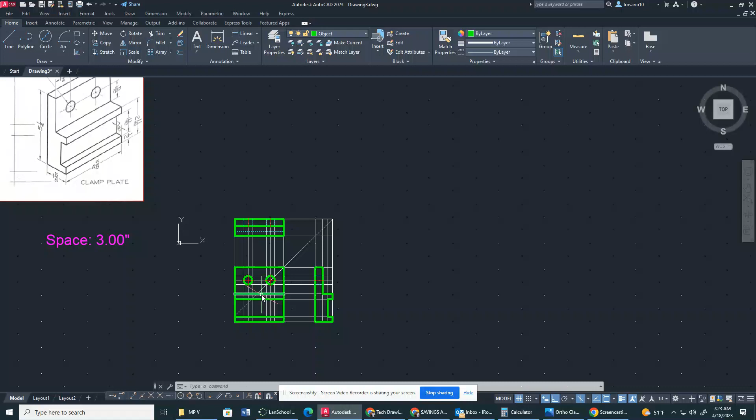So what we're going to have here is we're going to create the isometric drawing of the clamp plate. If you want to see it bigger, it's right here. So we already have our orthographic projections. Now, I'm going to start off with this by creating a bounding box. The bounding box is basically a construction box made with construction lines. With that construction line box, we're able to know if we're outside of our parameters, okay?

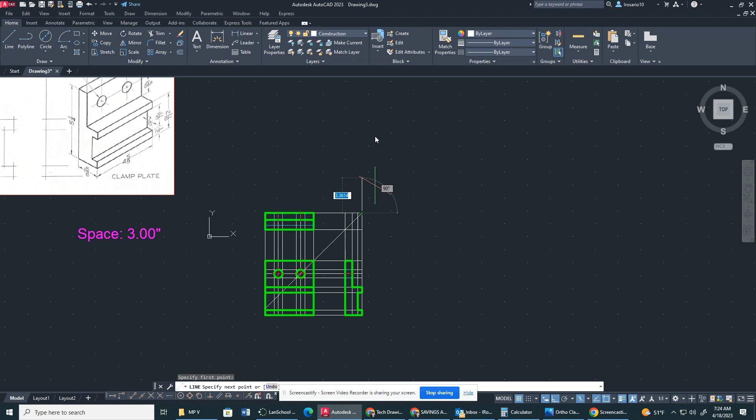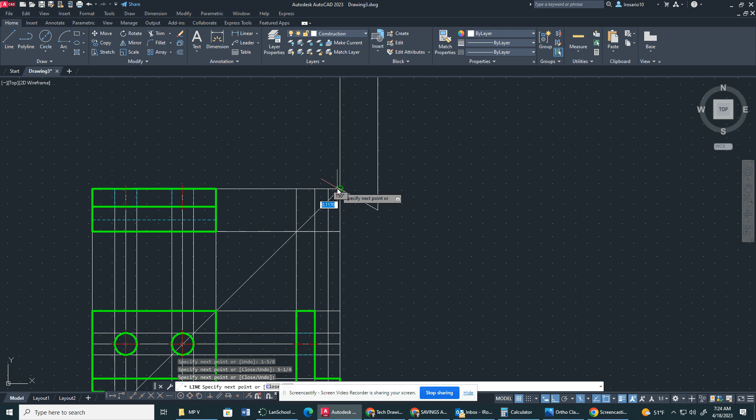So to start that off, I'm going to start off from this edge right here. I'm going to go up 5 1/4. I'm going to go over 1 5/8. I'm going to go down 5 1/4. Right? And I'm going to change my view. Go into my top view.

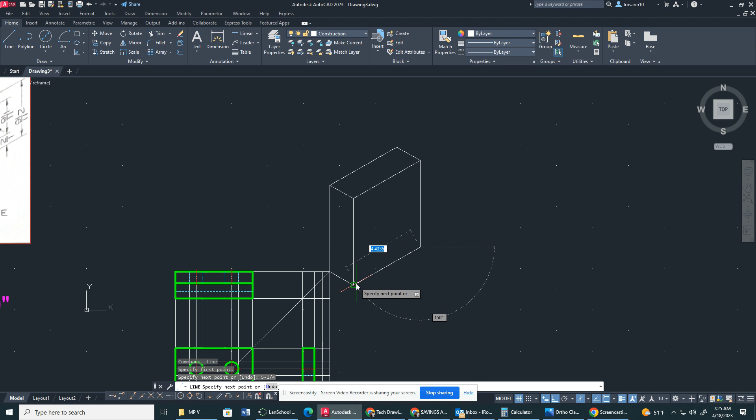I'm going to go across 4 5/8. I'm going to go over 1 5/8. Close it up here. Go down 5 1/4 and go across. Okay. So

I'm going to change my projection and I'm going to draw this from the side view. I'm also going to change my layer property to object and I'm going to go down all the way, go across, and then I'm going to go up 1/2 because it's ½ inch up. Then I'm going to go to the left 7/16. Then I'm going to go up 1 11/16. Come back out 7/16. Go up

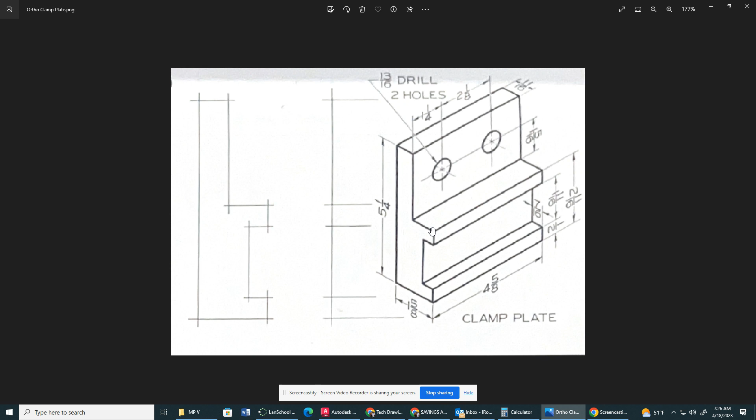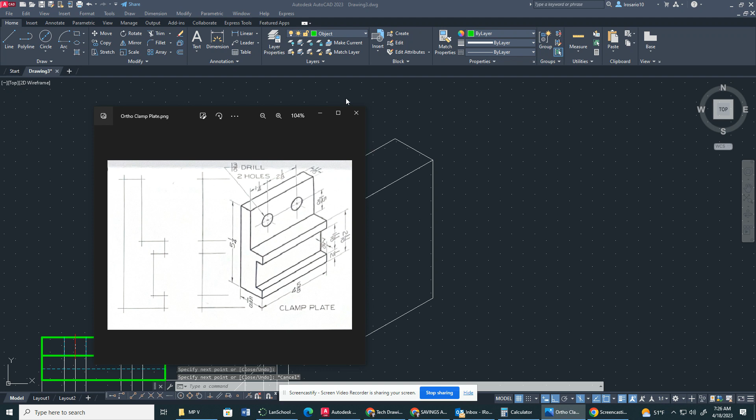1/2. Now, to find out this measurement right here, what you would do is subtract 11/16 from 1 5/8, right? Because we want to get this ledge. So that comes out to 0.9375. And you have to go up. If you go up, that is 2.5625, and then you come across, right? So to get that 2.5625, all you have to do is subtract 2 11/16 from 5 1/4. Okay.

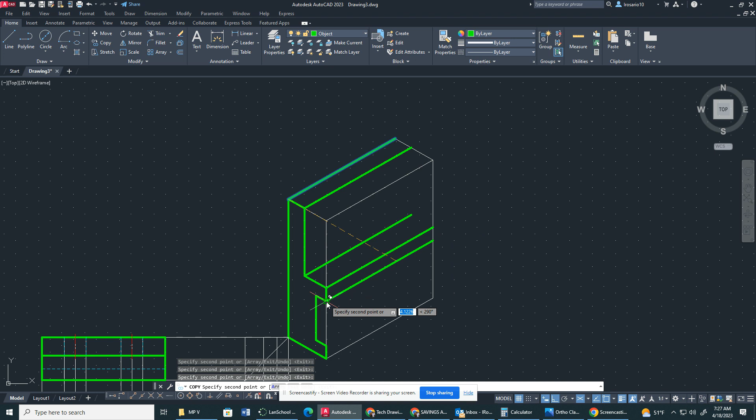Now, all I have to do is draw a line here. And this is where it gets easy. So I draw a line going all the way across, and then I'm going to copy this line. Right here, right here, right here, there, there, there, and there. Now, all I do is just create a line, and I fight the constraints because it's going to want to go straight because we have ortho mode on right here. All right.

Now, I'm going to stop right there. I'm going to change my view, and I'm going to go from the bottom, right? And I'm going to go up 1 11/16. Now, just remember, we're going to have to trim, okay? So I'm going to trim this line.

Now, we're going to have to do some copying. So I'm going to copy this line from right here, bring it there. I'm going to change my line of projection. Sorry. I'm going to click this line, and I'm going to copy it again to bring it down. So now I have to type it in. I'm going to type in 1 1/4, right?

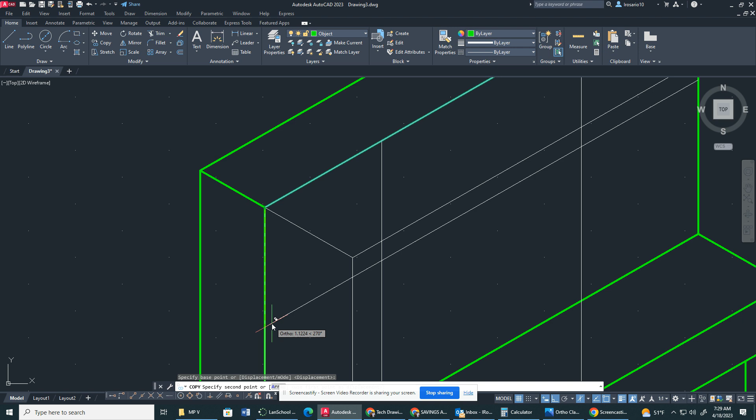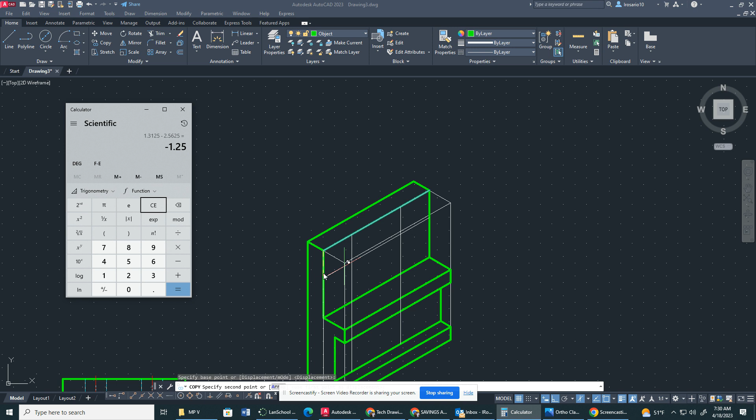let me just make sure my math is correct, okay? Because it's 1 15/16 from the bottom edge. So I know this is 2.5625. This whole line right here is 2.5625. So I'm going to do 15 divided by 16 plus 1 minus 2.5625. So that gives us 1 1/4. Okay? So I'm going to go down 1.25. And that's going to give us our center line for our circles. Okay?

Now, I want you guys to do both methods of doing the circles. So what I'm going to do is the first one, axis end.

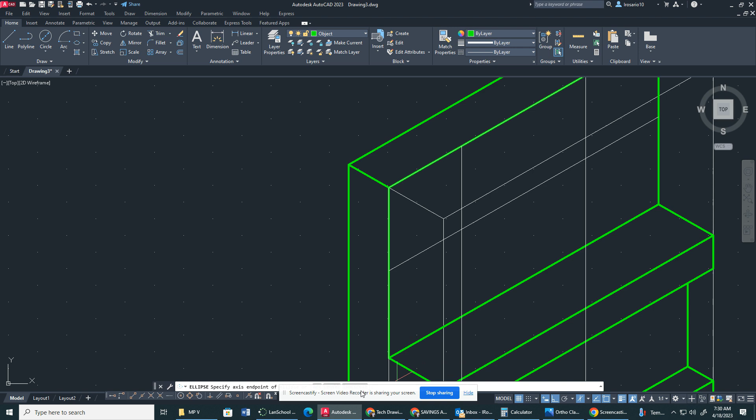Sorry, let me move this over. I'm going to do iso circle. Go right here. I'm going to type in diameter. And my diameter for the circles is going to be 13 divided by 16. There you go. Now, for the other circle, I have to see the construction lines, okay? I have to see the construction lines.

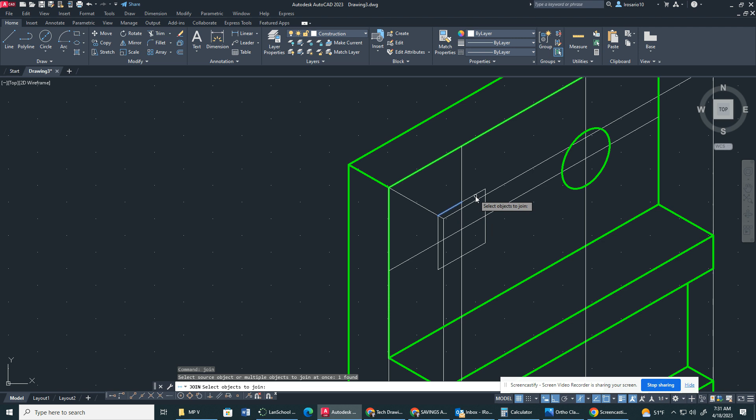So what I'm going to do is I'm going to type in 13 divided by 16 divided by 2, and I get 0.40625, which is the radius. So we have to go up by the radius, so 0.40625, over by the radius, 0.40625. Then we can go down the full diameter, which is 0.8125, okay? 0.8125, 0.8125, 0.8125, and then close it off right here. Remember to join. So join, I'm gonna join, enter, okay?

Now, we gotta make sure we create our center lines, okay? If you wanna delete these construction lines right here, so you're not getting confused, by all means do that. Whatever you need to do to finish this drawing, do it, okay? So what I'm gonna do is I'm going to go over to center, annotate. I'm going to do center line. I'm gonna click here, and then I'm gonna click center line here and here, right? So that's how I get my center line going.

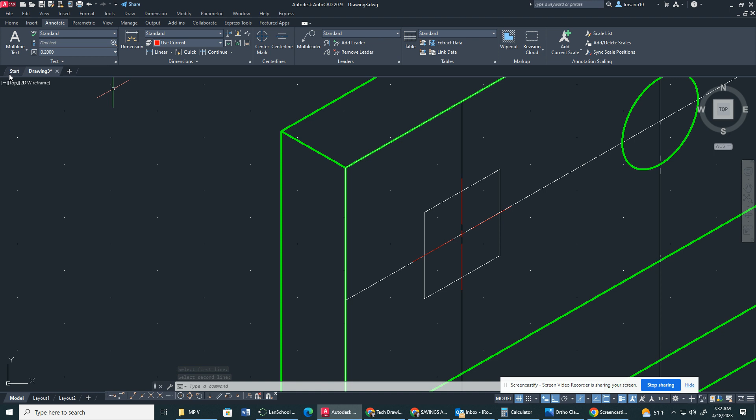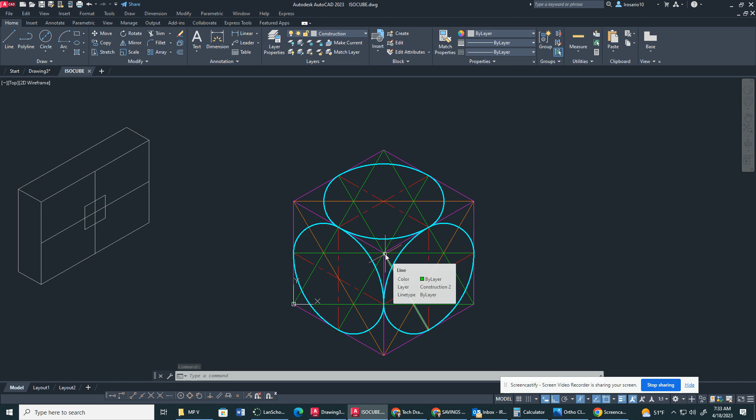Now, if you need to bring up your IsoCube project, by all means, do that. So we're gonna compare this side right here to this side, okay? We have to make sure we create that pattern. So I'm gonna create a line going across diagonally, right? That's gonna be in my construction line. So I'm gonna create a line going across right here, okay? Then I'm gonna create the 2 parallel lines. To do that, all you gotta do is go 1 line from here to the center, 1 line from here to the center.

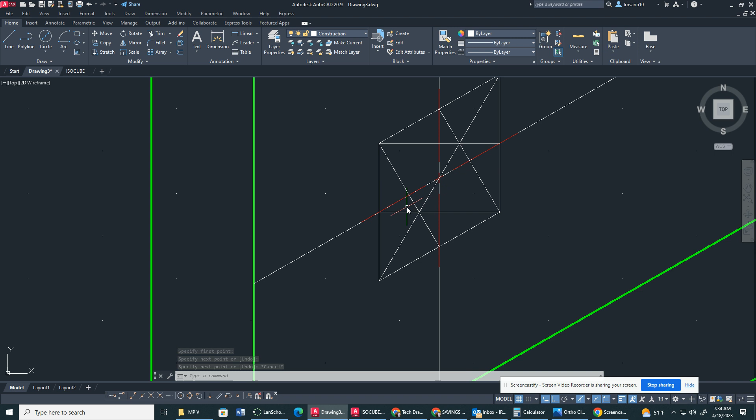So I'm going to do from here to right here, and from here to right here. And if you take a look at it, coming from the bottom, it's kind of like the similar way from there to there, from there to there. So line from here to here, and then a line from here to here. See how we have two sets of parallel lines, one, one, and then two, two. All right, so now we have our pattern. We can start doing this the original or traditional method.

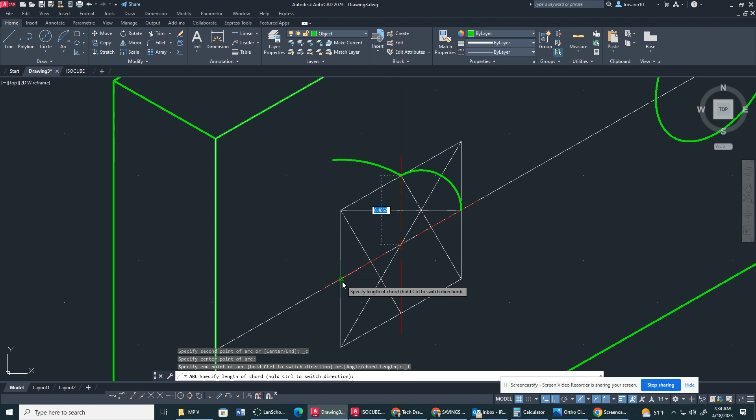Start, center, length, right? So start, center, length. Let me change that though. So my object layer property, I'm sorry, you gotta click on this first, then change it to object, right? Now, start, center, length. So we just did quadrant one. We're gonna do this quadrant right here, quadrant two. So I go from here all the way down to here, sorry. Start, center, length from here all the way down, and length is right there, right?

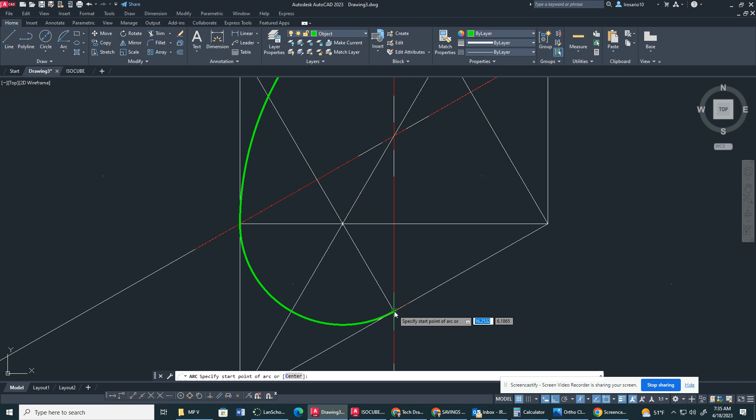Start, center, length again. Quadrant three is the same as quadrant one. So my start is here, my center is here, and my length is right here. And then start, center, length one more time. So I'm going to start from right here, go all the way here, and my length is right there. Okay.

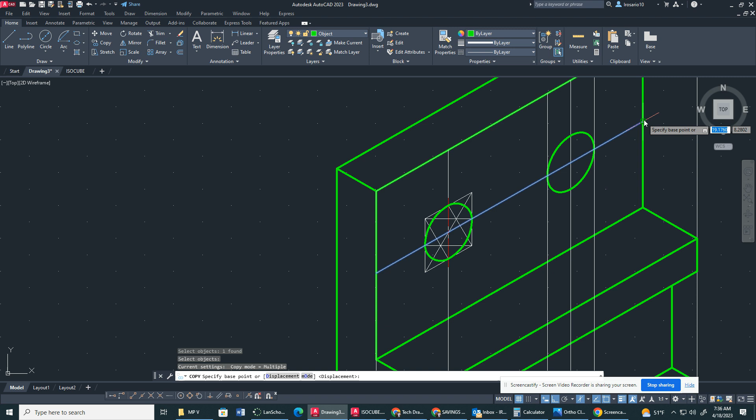I would prefer if you guys were to basically offset, or I'm sorry, copy the lines by the radius. So like that, you can get the center line going. It's not necessary though. What I'm going to do is I'm going to move this over by 0.40625, which is the radius, and then also to the other side, 0.40625. And then I would copy this line right here, 0.40625. Sorry. And then downward, 0.40625.

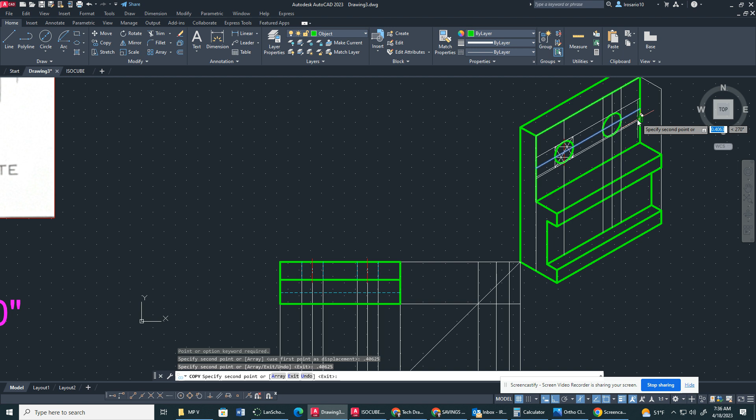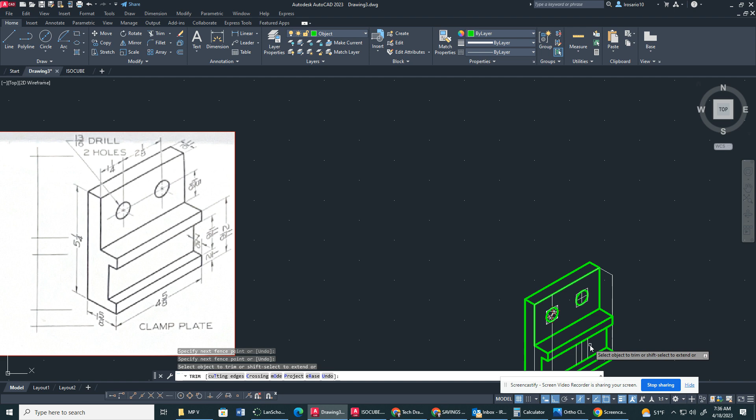So what you can do here is you can trim. I'll probably delete this too. You see how this shows that we're correct with both of our circles, right? I'll probably trim this up. Yeah, I'm gonna trim this up. There we go. Right. So now, and I can even delete this line right here.

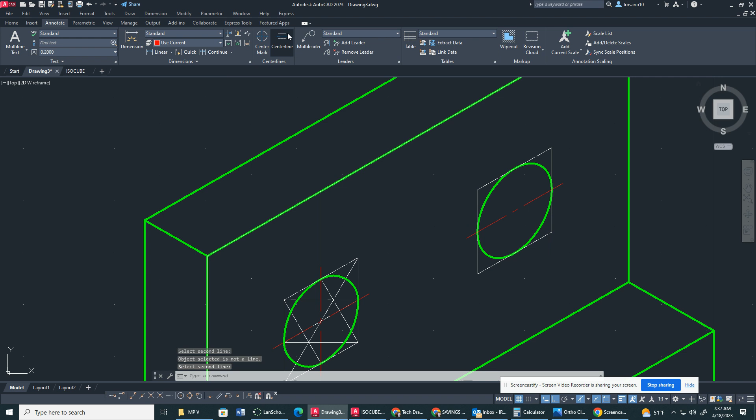Right now, I can get a center line going. Annotate center line. There we go. And then center line right here. Okay. I have to see these construction lines, please and thank you. And that's going to be all.